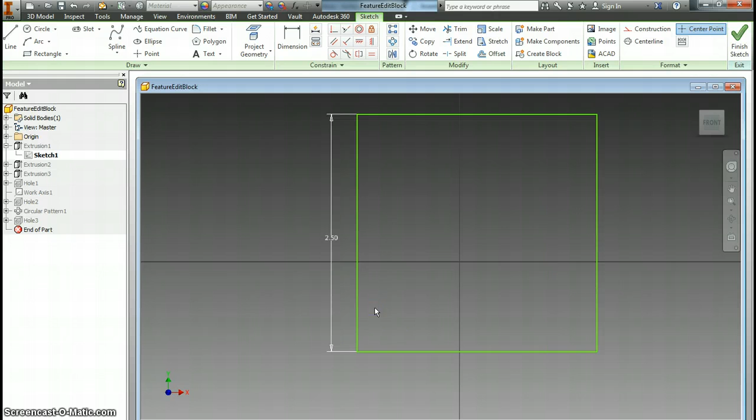First thing we're going to do is go to the original sketch from the original extrusion. I'm going to right click on it and I'm going to say Edit Sketch. And instead of our base being 2 inches by 2 inches, we're going to change that dimension to 2.5 inches by 2.5 inches. So we only have to change the one dimension. It was set up as a square, so it changes both. Then I can just hit Finish Sketch, and that'll update our drawing.

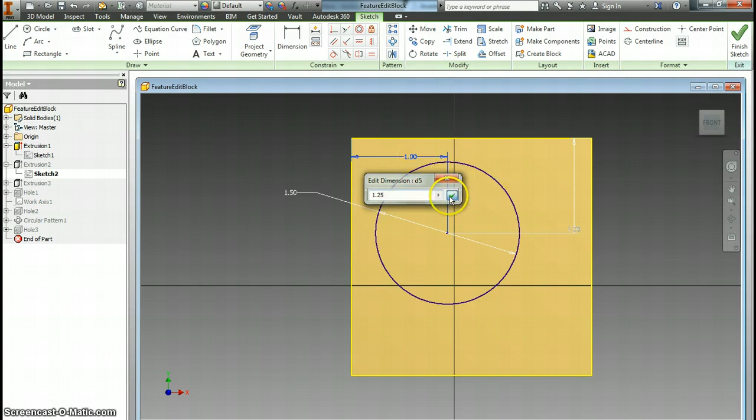Now what you'll notice once it updates is this whole centerpiece is no longer centered because we made the base bigger. So now let's go ahead and recenter it. So we'll go to the Sketch under Extrusion 2, right click on Sketch and say Edit Sketch. And we need to change this 1, which used to be half of the base. We need to change it to 1.25, and same thing with the other, 1.25. Alright, the diameter of this stays the same. We don't change that, and that stays at 1.5. But now it's centered, so we hit Finish Sketch, and it'll rebuild.

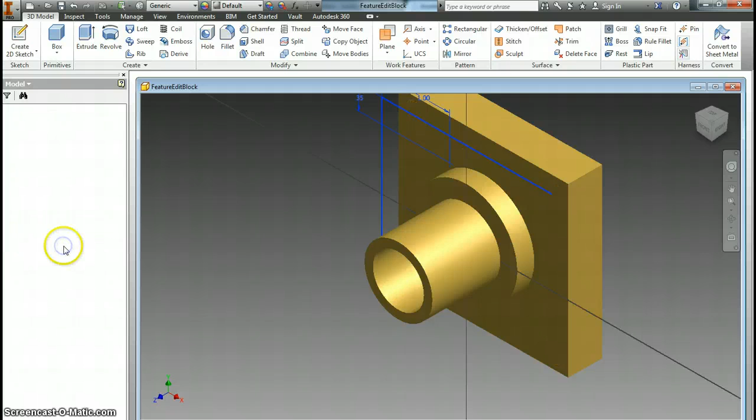Now if you notice, these holes used to be on this platform, and they're no longer there, so we need to recenter the holes. So we'll go to hole 2. Hit the little plus next to it, and there's the sketch for it. It was sketch 5, so right click, Edit Sketch, and we need to change this 1 dimension to 1.25 to get it centered. And where it says 0.35, we're going to change it to 0.65, and that's going to send it down onto the platform again. And when we hit Finish Sketch, now our holes are back on that platform.

Okay. And at this point, we've got 7 holes around this. If you look at it, there's 7 holes around this. We're going to change that. Let's go to this circular pattern where those holes were created, and if we right click on it, we can go to Edit Feature, and you can see there were 7 holes that were distributed over the 360 degrees. Let's change that 7 to 10 holes. And when we hit OK, now it has 10 holes around that circular feature.

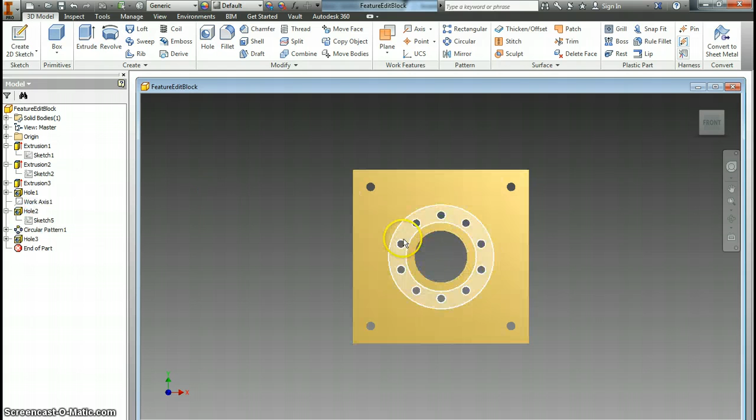Alright, and we're going to do one more adjustment on this part and then it'll be done. These corners have a counterbore, which means the top part of the hole goes down some before the real hole starts. That's so that if you're using like a bolt, the head of the bolt can sit down in there. But we're going to change that. Right now they're 1/4 of an inch deep, and we only want them to be 1/8 of an inch deep.

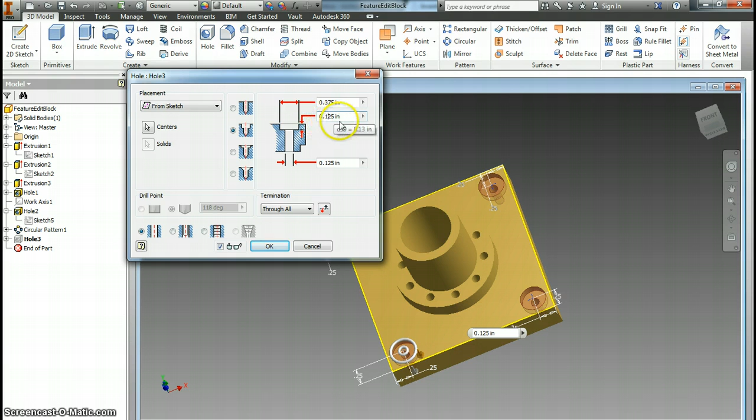So let's go into hole 3 where those were created. I'm going to right click. I'm going to go to Edit Feature. And you'll see that it was a counterbore. And the depth for the counterbore is set up to be 1/4 of an inch. I'm just going to add a 1 in there, and that's going to make it 1/8 of an inch. 0.125 is 1/8 of an inch. And you may have noticed these just got shallower. And I'll hit OK. And that is the finished product for this part, this feature edit block.